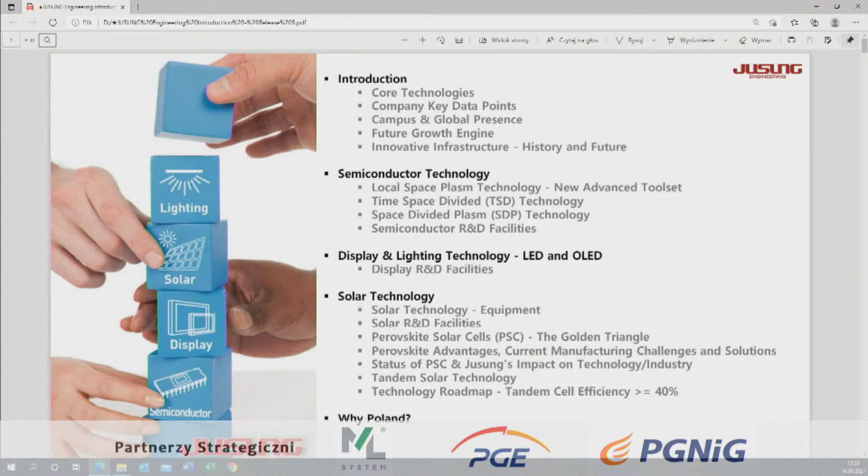I would like to do an introduction of the company, allow me to do that because it will give you a reference of who we are, where we came from, and how we got where we got today. I will also talk about some of the core technologies we cover, including semiconductor, display, LED and OLED technology. The last portion of this presentation will be about solar technology, which is probably more relevant to our partner. So go ahead to the next page.

Basically, Jusung is a South Korean company, and we cover three core technologies. One is semiconductor. The other is display, including LCD and OLED technology - we did a lot of TFT in the past. And we have a division of solar.

South Korea resembles, in certain ways outside the realm of geopolitics, very much Poland. So I do see that in Poland there are huge opportunities to go into these technologies. Everything was brought from either Japan or the United States, and it was basically copied. But then the government of Korea decided to create and invest in the semiconductor industry.

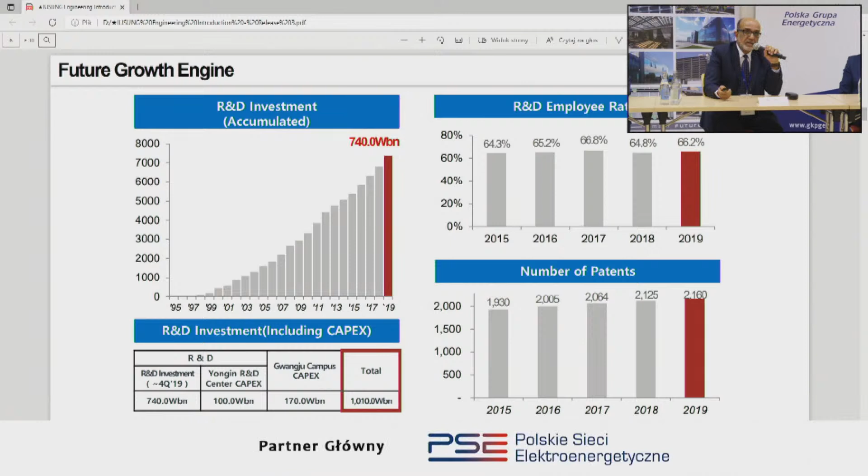This goes into a little detail about the structure of our company and our investment. This is very important because we take innovation at heart—if we don't innovate, if we don't do research and development, then we have no business. Over the years of the company's existence, we've spent about $1 billion on research and development. Employee-wise, we have 66.2% of people exclusively dedicated to R&D, and we have a bunch of intellectual property.

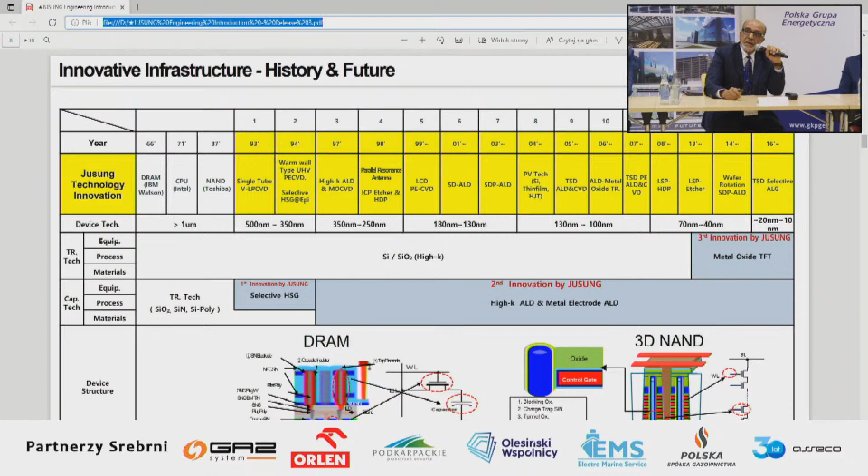This is just more detail, showing a little history of our innovation and where we're going. This isn't the latest or most updated data, as it stops around 2015 to 2019 maybe.

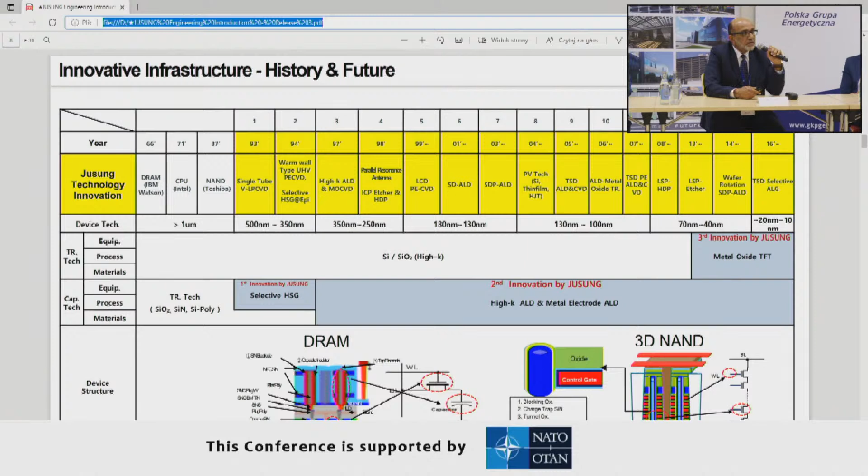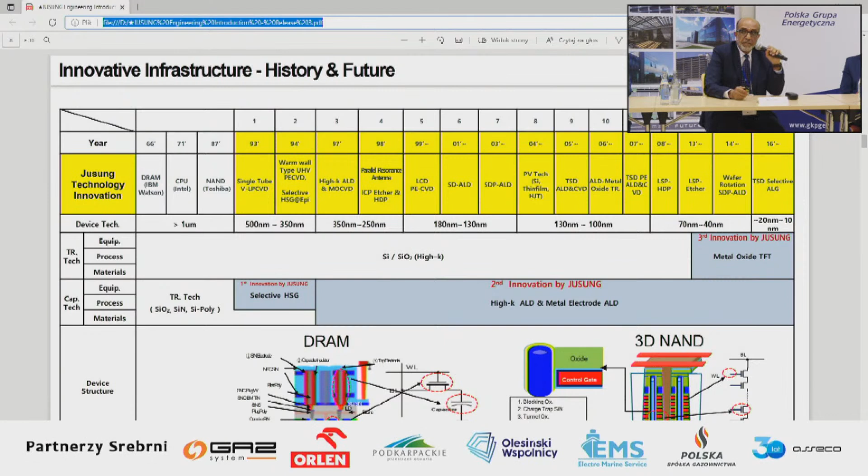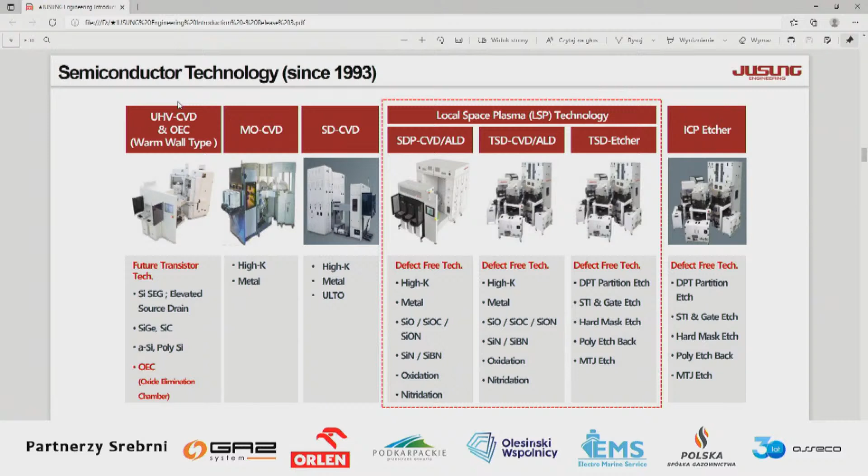With the semiconductor, I wanted to present some of the tools and processes. Since this conference has a lot of scientists and researchers, I'm sure they can relate to some of the processes we do. What you see on top are the deposition tools, CVDs, different types of CVDs, and in the middle you see the tool—at least you get an idea. But the bottom portion is probably most important, because that's what a professional understands when he looks at the process.

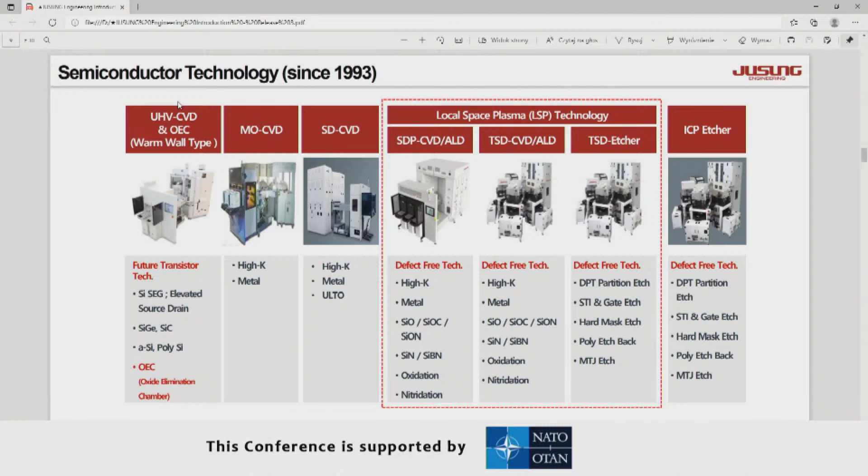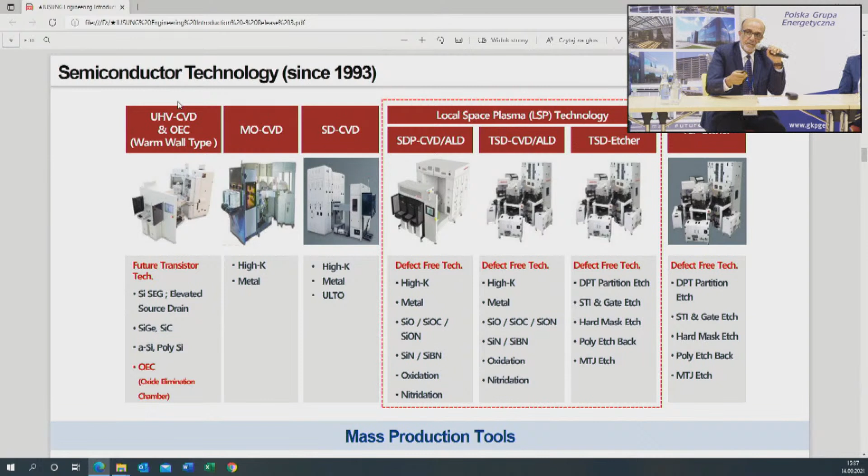We work with different materials and processes, like high K, deposition, STI, poly, and different things. The one circled in the middle, the local space plasma, is a very recent and advanced tool that does so many things for the industry—we sell them to a lot of our clients. I'll talk a bit about these things because for some professionals it makes sense when they see what I'm going to show them. Go to the next slide, please.

So basically everybody around the world has been building these deposition tools, different types, different processes, different sizes. But what we've realized in recent years is that you cannot do only one thing, you do multiple things that are correlated. If you start with one step, you've got to do the second and the third. Because of the real estate in these sophisticated fabs, our customers ask us how we can combine these processes in one smaller tool that gives us the throughput and yield we're looking for.

So we came up with this idea of LSP technology, local space plasma. Underneath that global category, we have two types depending on what you want to do with the tool - memory, logic, microprocessors. Then you get into time-space divided plasma or space divided plasma.

The most important thing, without going into details, is that these tools provide the best interface control, incubation time control, and low thermal budget, which is very important for a lot of processes nowadays. The system is very easy to set up and function, and very easy to integrate with other processes on the production line in your fab.

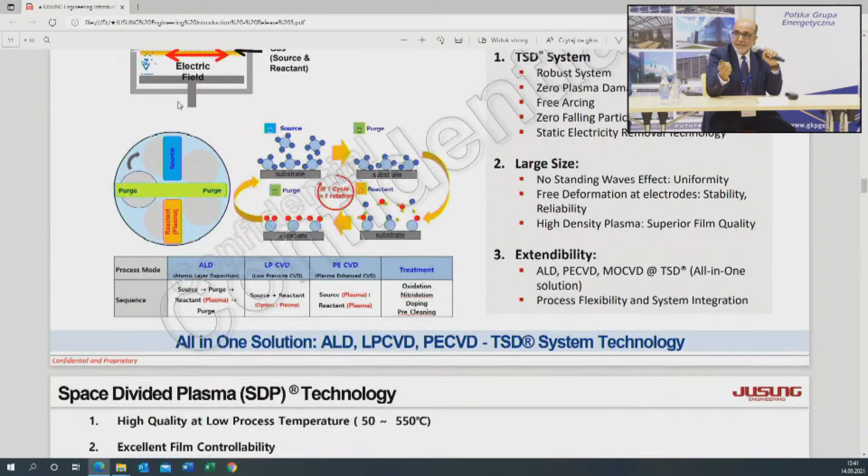Please go to the next slide. So some of the advantages of using these tools: number one is the thermal budget can be very low - we're talking about 50 Celsius, which is enough for a lot of applications to deposit different materials. Since we are a thin film deposition company, this is our very core expertise.

Step coverage, stress control, and even the etching is very good, and the rate is very good. Please bear in mind that these tools are for mass production, so they have to be very quick and have high productivity.

So for example, a CVD process is quite fast, but there are some processes where it takes more time because you need more complicated depositions. So we use ALD tools. An ALD tool is very slow, and everybody knows that.

But what we've done with this tool, since we have like a rack - this is a bit of an older version, the newer versions can tackle much higher production rates - it's like rotations: you put all your wafers on this disk, and they rotate at very high speed, and the deposition happens, whether CVD or ALD, very fast.

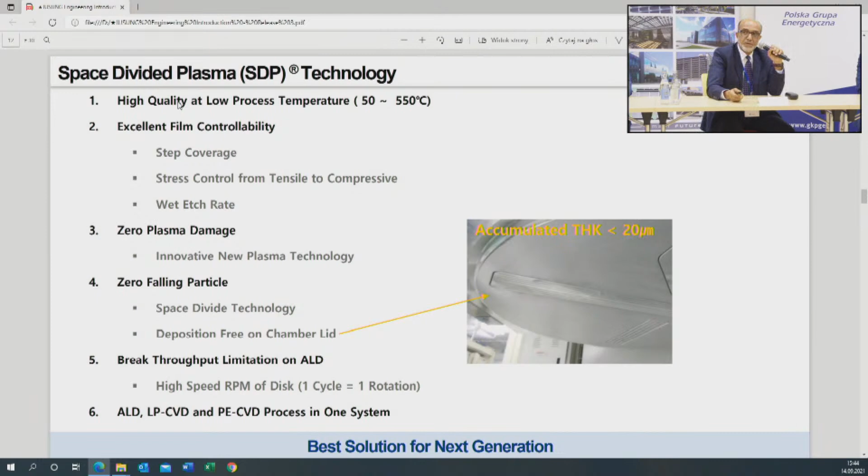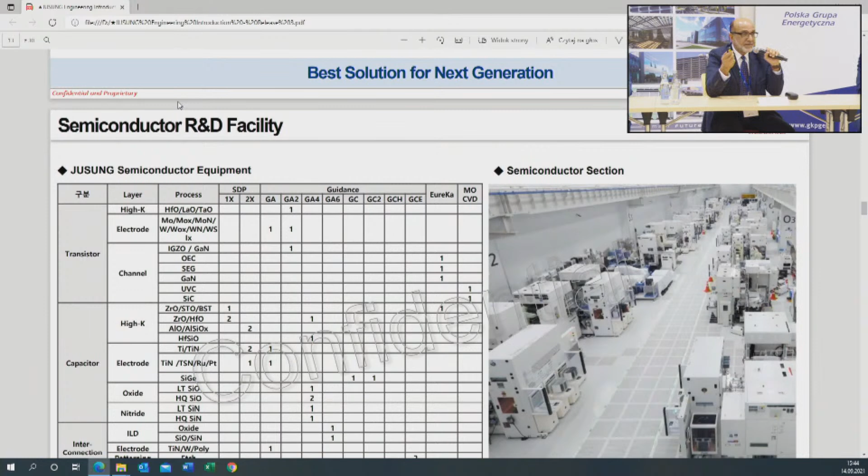So here I just showed very quickly some of the tools we have in the R&D lab. We spend a lot of money on R&D, and we spend a lot of money on our people, but we want to make sure that everything that gets out of Jusung is fully tested and working to the specs. Some of these tools also, we use for demos, because that's the first thing the customer asks. They send us wafers, and we go through a demo process, and once things look good, we start talking about the equipment. So this is just a snapshot of where we put the tools for semiconductor.

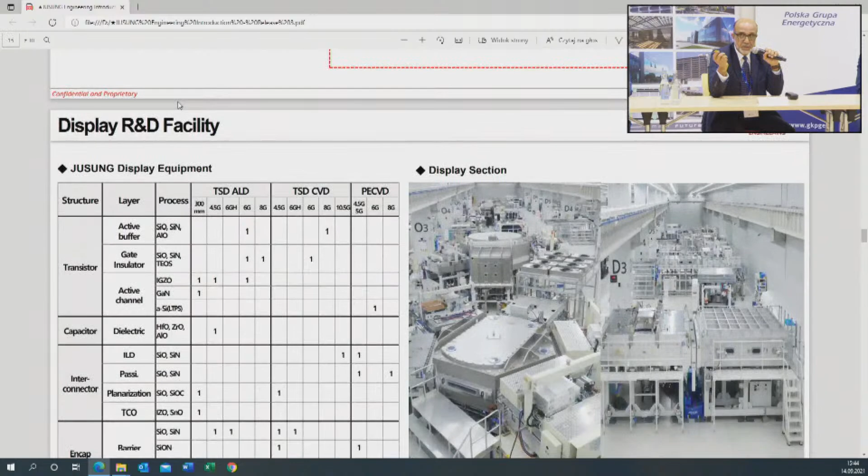Keep going. Again, the same thing, this is semiconductor display. This is a display. I need to go a little bit quicker because I don't have a lot of time.

If we look at solar, at one point we did thin film, we did flexible thin film, we did building integrated, we did vehicle integrated. One of the things we did is the heterojunction, because when we looked at it, it had a very good innovative future. So we jumped on this heterojunction technology, and we have actually delivered equipment and even did some technology transfer to Europe on the heterojunction technology at the mass production level.

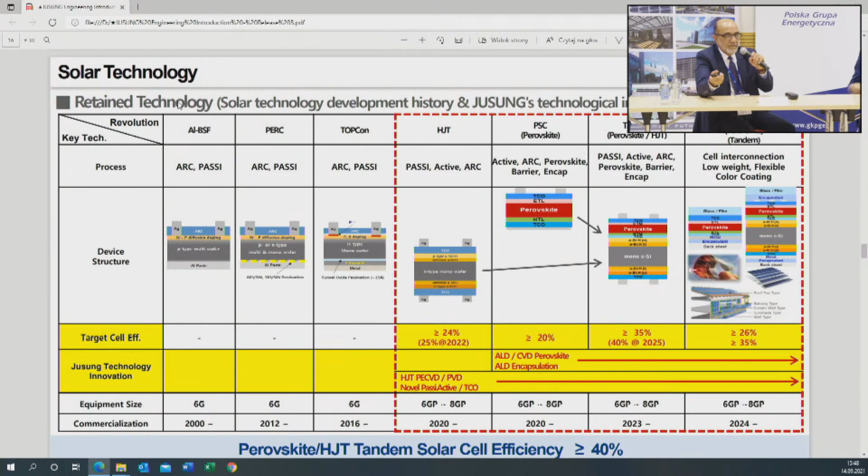But this technology of PV in the cell, that's really where we think it contributes to the idea of these glass panels, because that's where we do the conversion of the sun's radiation into electrical energy. So the cell is actually the heart of this, like smart buildings with panels and glass and so forth.

So we started looking at perovskites. Many people have been looking at perovskites. Perovskite, of course, is a material that we can find readily available. It's not rare. It's not very expensive, but it comes with a slew of problems.

At the beginning, when people started building cells using perovskites, they would build it, look at it, check it - whoa, I got 3% cell efficiency, great, super, that means we're succeeding. They turn around, go get a cup of coffee, come back, check it, and it's zero. It's gone, or it changes. Because the material being used has some properties that are very, very dynamic depending on the condition and the environment you are in.

So basically what we did, we said, this is a good innovative thing, let's look at it. And then we had some partners also who were really pushing us towards this.

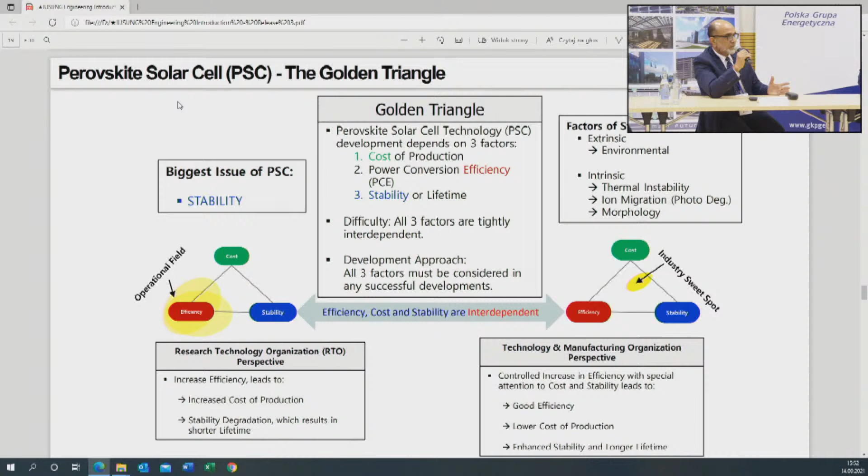But what we have realized is that the biggest problem in solving this dilemma is the stability of the material. Stability means how long this solar panel that we are building, or how long this solar cell, is going to last. If you sell a solar panel to your customer, you want to make sure that this solar panel will be at least operational at 90% or 95% for like 20 or 25 years. That's what the customer wants. You don't want him to change panels every year.

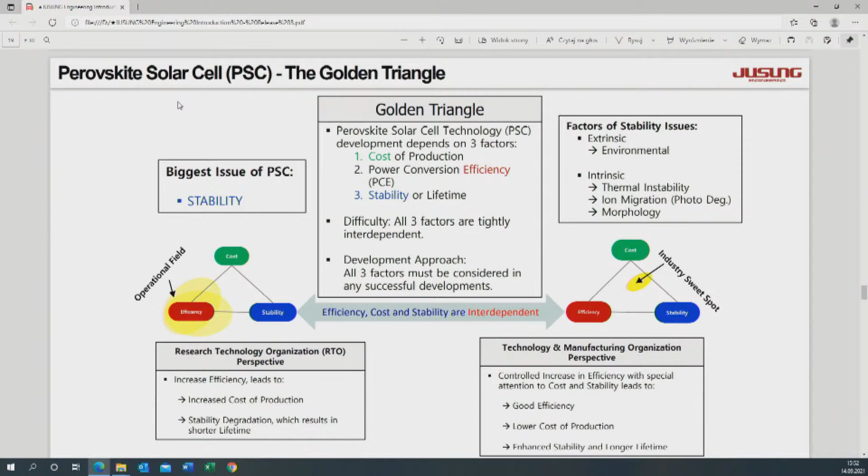So this is what we did then. We said we're going to look at these three things. So let's go to the next slide, please, which is good. So we looked at this.

For some of us, we already know this, so I apologize to the people who already know what the perovskite structure is and the crystal. Basically, it presents itself as an ABX3 structure - A being some material, B being some material, and X being some material.

I listed out some of the things that we work with. Some of the materials we use are organic, some are inorganic, and what the industry is realizing is that sometimes a good combination between organic and inorganic is probably the best. However, we need to do some extra work to protect the cell. So some of the advantages of the perovskite, as you can see...

Besides, it's a good technology that's going to propel us into higher and higher efficiencies. I think one of them is that we can exceed the theoretical limit, or maybe even a practical limit, of the crystalline solar cells. This limit has been set by two scientists - we call it the Shockley-Queisser limit.

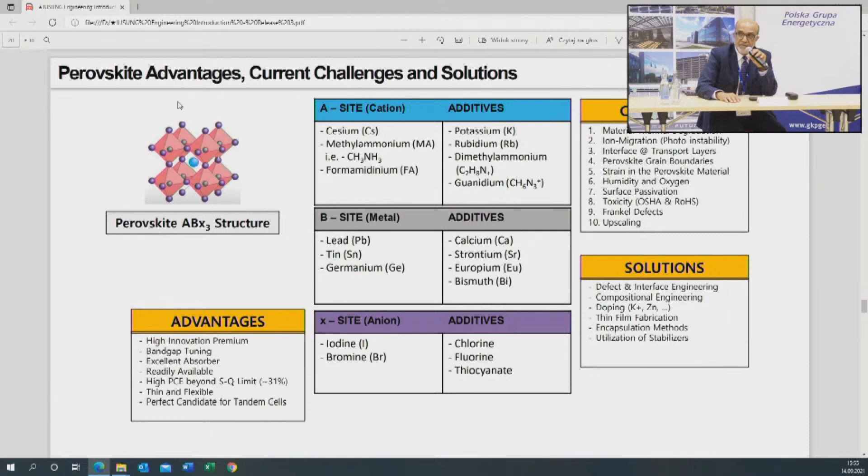I will not bore you with the challenges and the solutions that we have found, but let's go to the next slide if you don't mind. So what is the current state of perovskites right now?

So if you look at this, I'm going to go a little bit slowly on this one, because everything is very important on this slide. Basically at the bottom, if you look on the left-hand side, you see the top - that's the perovskite cell. In the middle, what you see like the gray granular stuff, that's the perovskite material.

On the bottom, you see the ETL, the electron transfer layer, and the top is the hole transfer layer. That's the encapsulation, and then we do the same encapsulation for the crystalline silicon-based cell. We have to make sure we have a TCO in place to conduct electricity laterally. In the picture on the left, the heterojunction cell is not shown, just so we can have a good blown-out view of the perovskite cell.

So basically, some of the problems we've seen, which gave us a lot of hard time, are at the interface. Every time you take a material and put another material on top or below it, there is some dynamics that takes place. It can be physical dynamics, or chemistry, especially chemical dynamics between the molecules. So what we try to do is eliminate those dependencies on the layers.

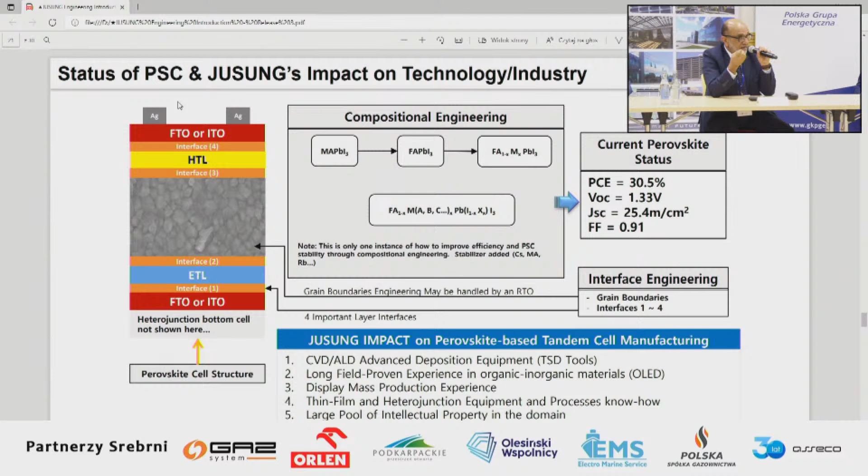I put in the bottom why we think we can close this gap, because this ETL, what you see in blue and yellow on the cell, the ETL and the HTL, is the same thing we deposit for OLED displays. If you have an OLED TV in your house, it's very sensitive to humidity and oxygen. So if you do not encapsulate and protect the screen inside very well, it will degrade very quickly - it won't last more than a few days.

So we do the same, using the same principle. We have equipment that has actually been adapted from the display industry and is being used right now for the perovskite cell.

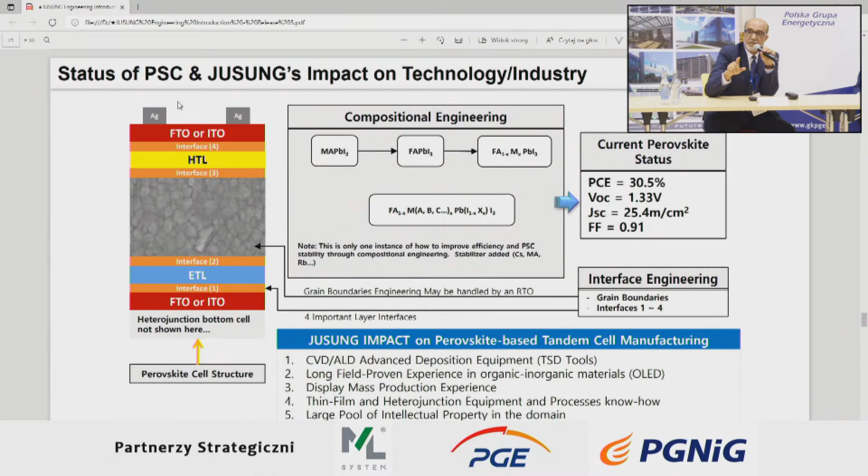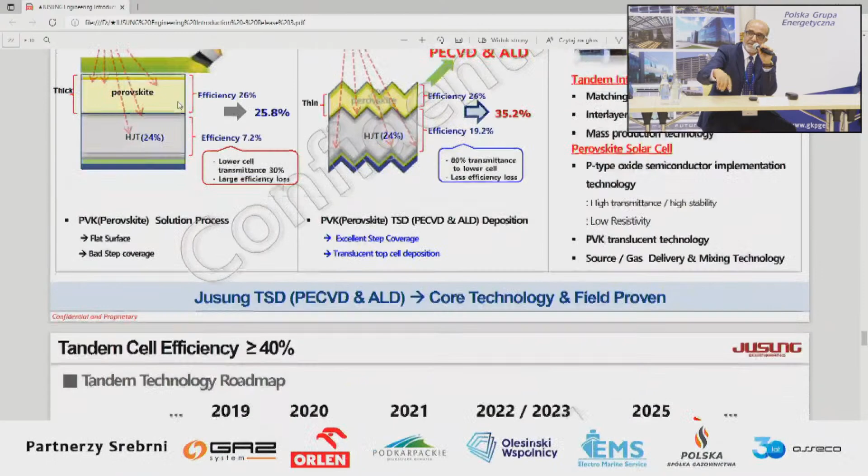Okay, let's go. This is technology, so I'm going to skip this. This is important though - this is our roadmap, very quickly. This is how we think: a goal without a plan is just a wish. If you look at this, behind it there is a huge plan of how to get from 2019 to 2025 and what we are doing.

On the top you see heterojunction technology, and on the bottom you see tandem technology. What we've done so far with heterojunction technology is as good as anyone else on the market, but we're reaching the threshold of heterojunction technology. So we need to add perovskite as a tandem cell. When 2022-2023 kicks in, we're looking at 35% cell efficiency, and beyond that, we're looking at even 40%. That's our plan, that's our goal for the future.

In terms of equipment, on the left-hand side we have a turnkey line solution for heterojunction. In the middle you have the perovskite cell making, and for the final part, we don't do print and screen. Go to the next slides.

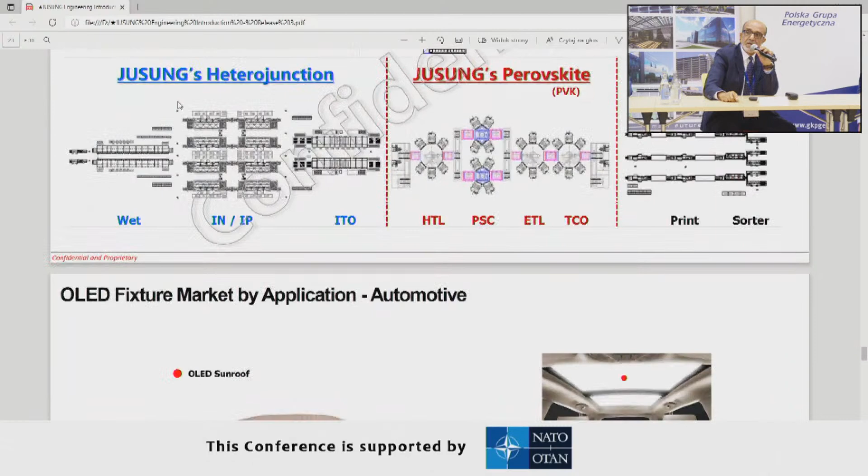Okay, this is only things we've been working on in automotive, because we've also combined OLED with PV, and we can do these things. We're working with some companies that you know in Korea and Germany.

All right, same thing with OLED lighting.

Keep going. I want to do the last slide. This is probably, you know, I'm going to try to make it as short as possible.

So a lot of people ask me, why do you come to this country? Why would the Korean want to come here and invest here and work here and develop partnerships and relationships? Well, those are some of the reasons we can think of. From a partner perspective, we are convinced that we're picking a strong industrial partner who has experience in an industry, whether he's doing glass, whether he's doing PV. At least he has the logistics, he knows what he's doing, he knows the business, he knows the market, how to sell, how to manufacture, and all this is very important to us.

So the first slide, the first window, you see that we have an industrial partner, and we're thankful that we have met ML System, and I think it would be an ideal partner. They have experience in BIPV, which is a plus, so we don't go through the basics again. They have a captive market.

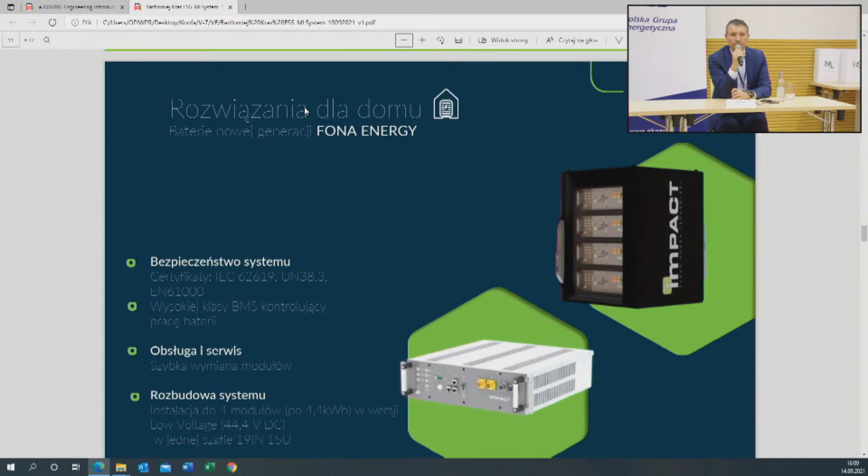First sector is home storage, and here we have developed the product called Fona Energy. It's a 4.4 kilowatt-hour, 44.4 volt battery pack for home PV installation. We have just launched the production line in our facility in Pruszków for 30,000 such battery packs a year, so we are prepared for the Mój Prąd 4.0 program.

The second product is destined for business, for modern supply of industrial facilities, so combining PV and batteries together. Later I will explain the business case about it.

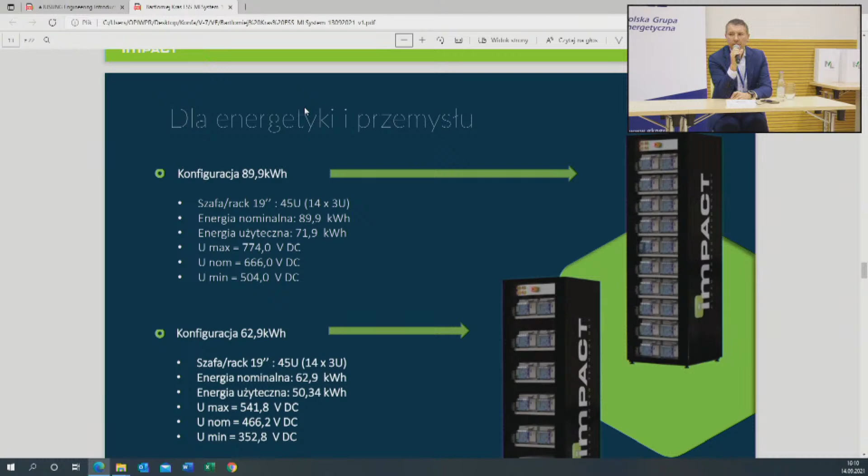And the last product is dedicated for large energy storage and large PV farms. We have developed a lot of such installations in Poland today, but practically none of them is equipped yet with energy storage, and future solutions for our power system will require also placing larger battery pack systems.

We have several installations done in Poland already. The very first one was made for Innogy in 2016 as a pilot installation of rather small power, 30 kilowatt hours. But then we commissioned two more large installations.

The next one started to operate this May. It has been developed for PKP Energetyka, and this large battery pack system is directly connected to the catenary grid to supply power for the Pendolino trains, and to keep the power inside the power lines. It has 5.5 megawatt power and around 2 megawatt hours of capacity inside the batteries.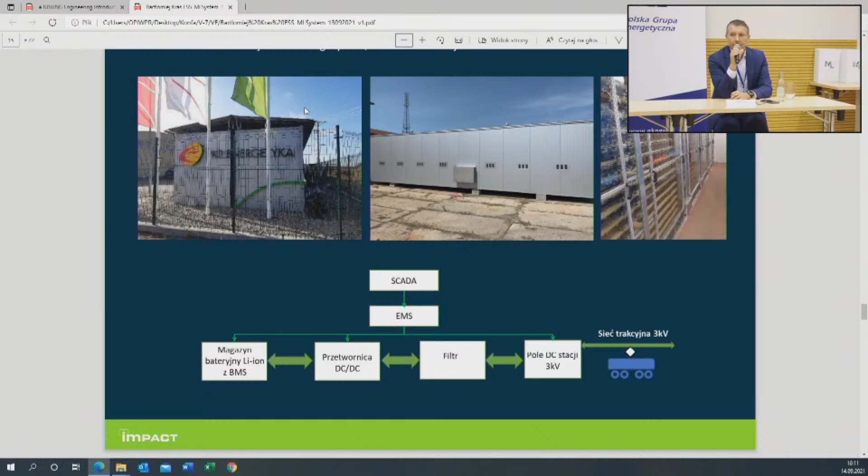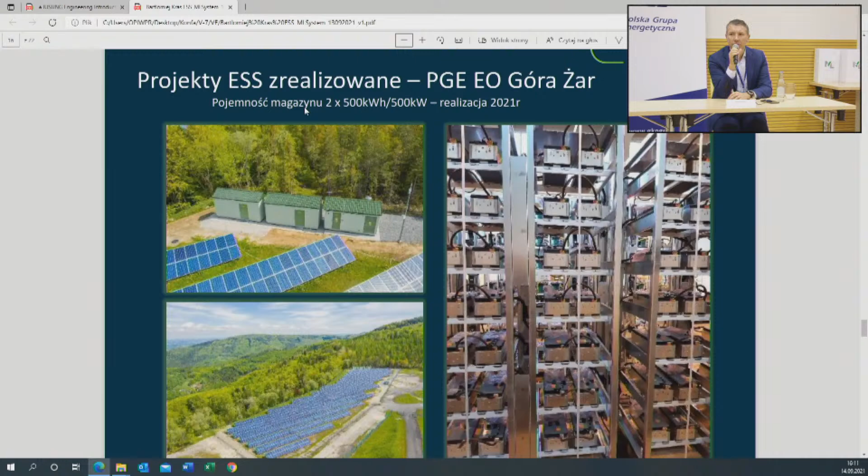And the latest installation, commissioned in June this year, is one of the first installations in Poland - a battery pack directly connected to the PV farm located south of Poland on Góra Żar. There is a PV farm belonging to PGE, and we have installed there an energy storage of 1 megawatt hour, which started to operate this June, and PGE is planning to make tests and validate it.

Now I would like to speak a little about how to size energy storage to the PV installation. This is a very common problem, because we have many factors in choosing the right PV installation and choosing the right energy storage. So this is a case from one of our customers who came to us asking whether we can size for him the PV installation and battery energy storage.

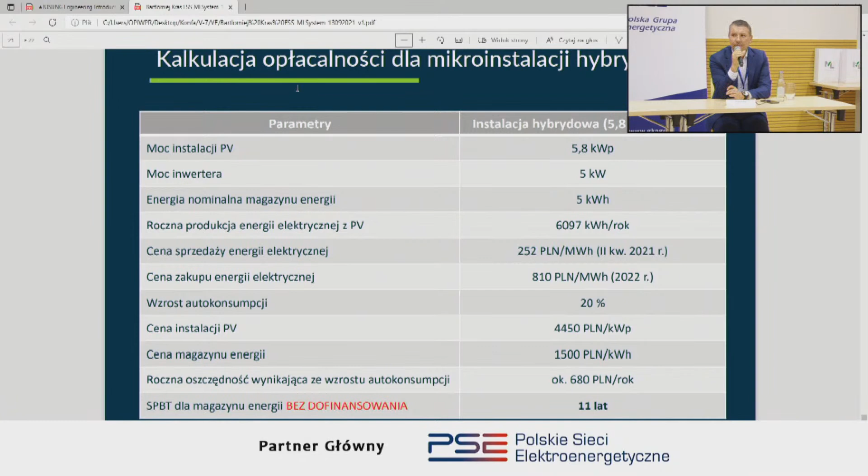So this is all what I wanted to explain, and we invite you to contact our company for all those sophisticated calculations. Of course, we are exactly in the middle of the decision-making process by our government on whether to subsidize battery storage in the next year, making these calculations much more profitable, or postpone this for later. So I would like to just present the situation without any subsidy. This is the situation on the Polish market today.

Thank you very much.

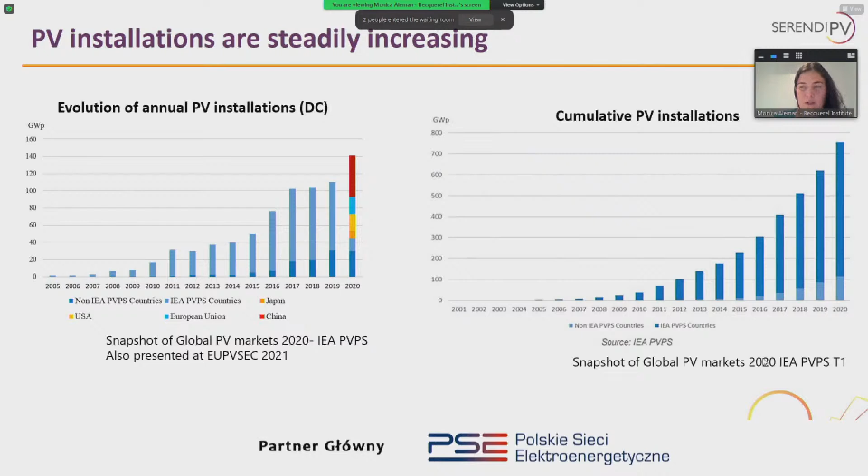So before I introduce SerendiPV, I think the most important question is why we're doing this project. The main thing is that we see the cumulative PV installations are rising. This hasn't stopped, and yearly installations for the world are at the moment over 140 gigawatts. So we know that this is going to become a much bigger thing in the future in the energy grids.

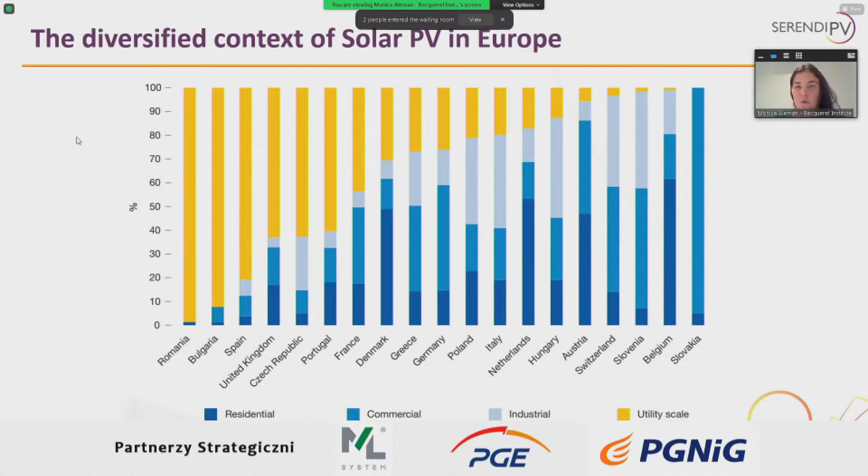If we look at the context of solar PV in Europe, we see that depending on the country, there's a big difference in the application of residential PV or utility scale, with countries like Romania where most PV applications are utility scale based, or Belgium, where it's more residential PV.

The question is how can we reduce the WACC, basically increase the trust in PV production and in PV systems for financing companies. What we plan to do in SerendiPV is work on quality control, component reliability, system reliability, and energy yield assessments. The target is to increase the lifetime of PV systems and components, and especially increase the performance of the PV systems.

Another issue relevant for the project is that PV systems are becoming more and more diversified, so in terms of modeling and yield modeling for such systems, there are differences that need to be taken into account. We have floating plants in France, more and more solar PV installations that can look like this or can be on greenhouses, BIPV, and plants in the desert.

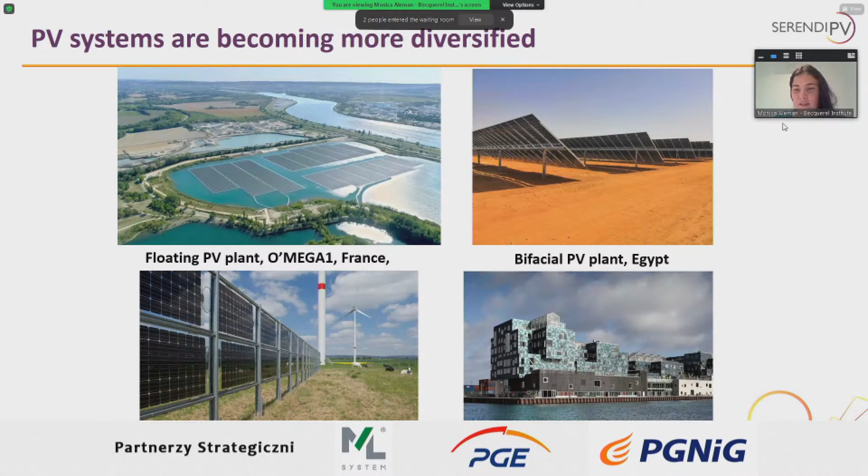If we look at the total penetration of PV for different countries, we see that at the moment in the EU we're at about 5% on average. This is for 2019. But the idea is that with the increasing penetration of PV, this is going to create a bigger challenge for the network.

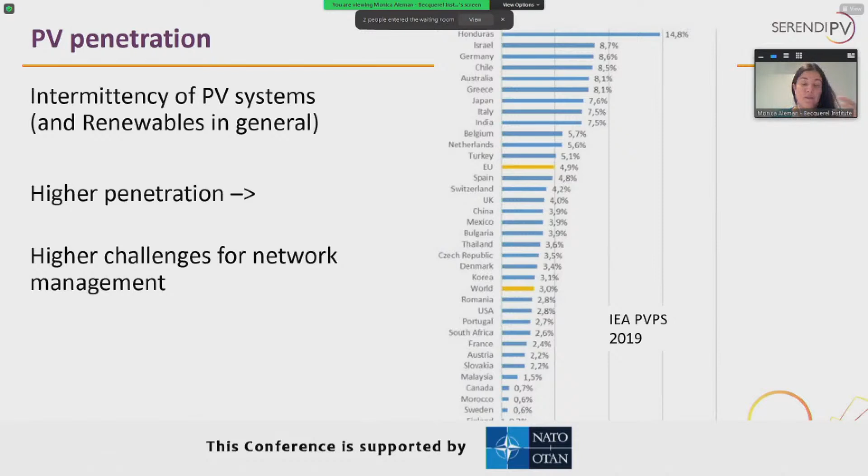The targets in order to maintain the Paris Agreement have been calculated by LUT University in Finland. They expect that solar PV should represent about 69% of total electricity production. So this is going to be huge if we want to maintain the Paris Agreement.

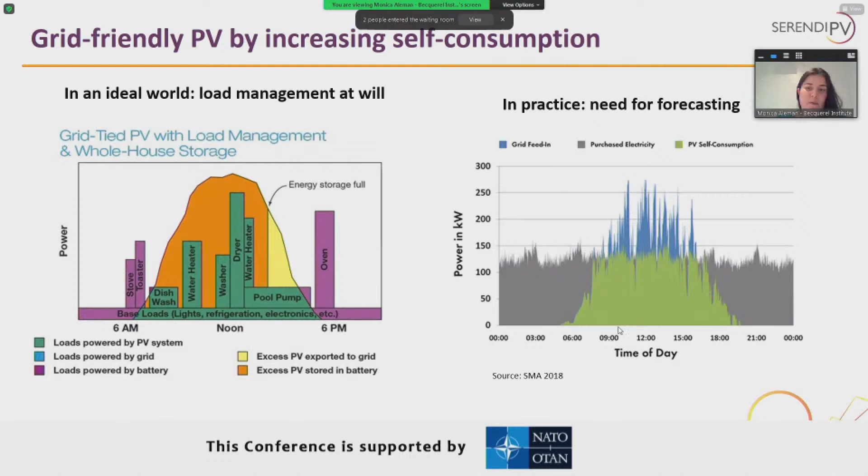Ideally, when we do the integration of PV in the grid, we would like to be able to define exactly what's going to happen in terms of load management, so we can adapt it to PV production and also use storage systems. In practice, we need to do a lot of forecasting, because precise predictions of PV production are very important when this would represent the biggest part of electricity production in Europe.

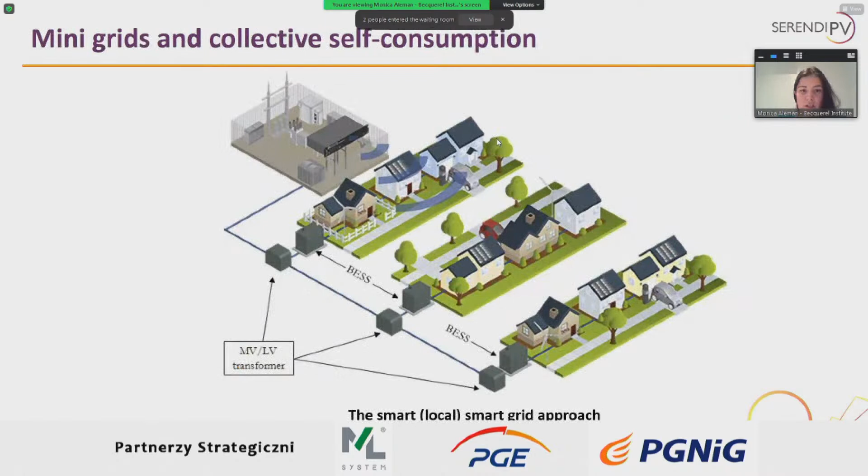One idea people are working on is considering mini grids and collective self-consumption, where you would have a set of houses connected to a battery system, and these could be connected to one another so the consumption and production could be optimized, not just at a house or residential or company level, but also for a small local energy market.

If I bring all these points to SerendiPV, what we want to do is increase the reliability and performance of PV systems, decrease the LCOE, increase the profitability of PV generation in the grids, and increase the stability when PV penetration is higher. At the end, we want to lower the barriers to enhance the development of the PV sector in the EU. This is what SerendiPV is looking to do.

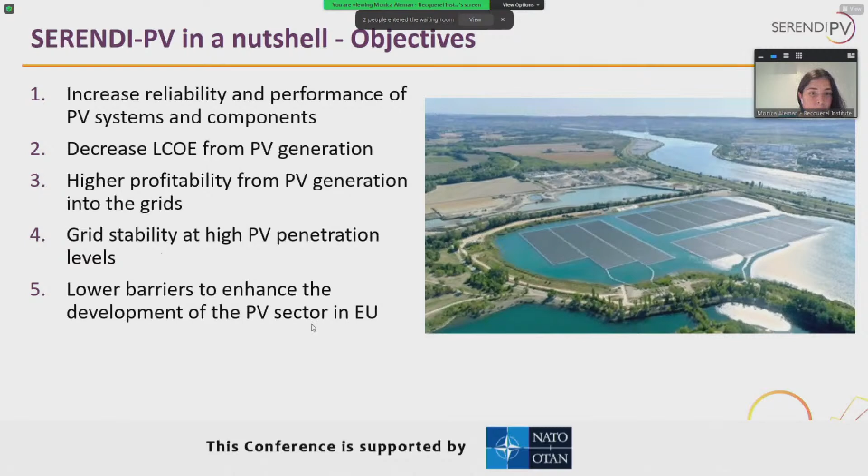So we have developed 7 axes to be able to do that. I'm going to go one by one later, so I'm not going to spend much time on this slide, but here I'll explain a little bit about each one.

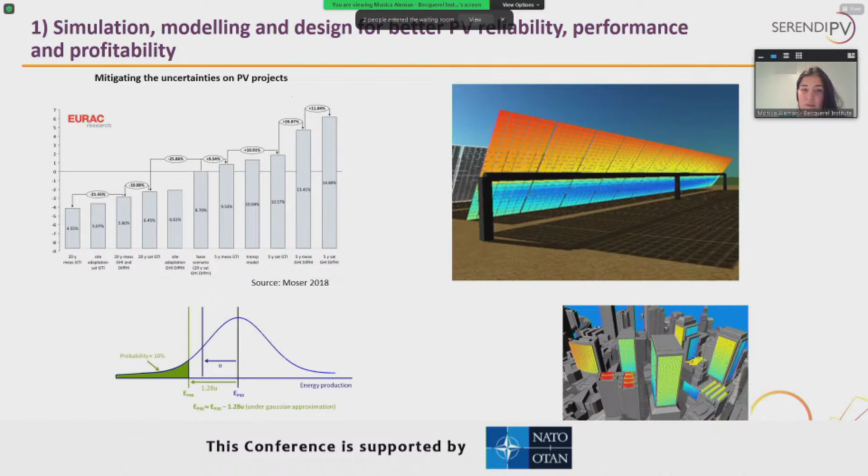The first one is about simulation. Here we want to improve all the modeling parameters and modeling tools in order to give better reliability about the performance of PV systems and increase the profitability. Afterwards I can send you the slides so you can look at the references.

The second working axis is about monitoring and image-based fault diagnostics. Here we want to improve the monitoring of PV on the field. For this, we're developing soiling kits that can be installed at PV plants, and we're improving the modeling of PV plants which might be covered by soiling issues. The whole point is to improve the reliability of the energy yield assessment and to reduce the factors that are reducing the production of PV plants.

Then we are putting in place quality control equipment and procedures for PV components. Here you can see some examples of what we can do in some universities like at CEA. They have testing sets where they can very well define the failure mechanisms of PV plants, and then the idea is afterwards to introduce quality control procedures.

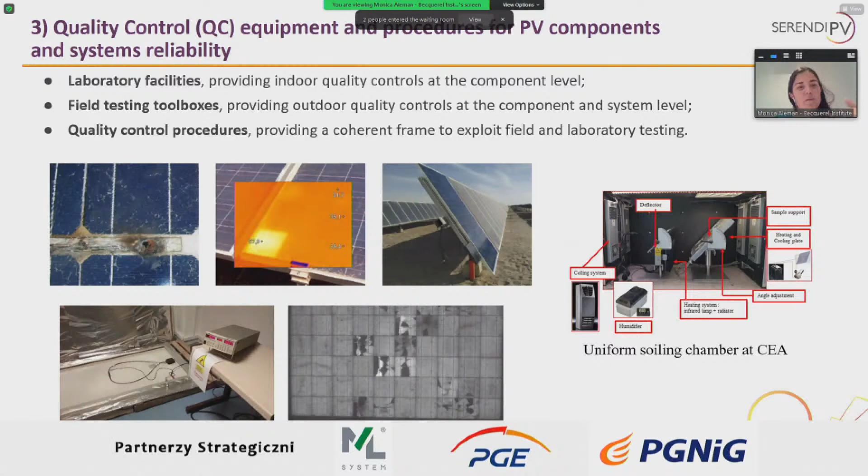Then we have an axis called forecasting, where Solaris and Fraunhofer are very active. The idea is that you start from numerical weather predictions, then look at satellites for cloud motions, so that you can use machine learning with real-time PV power measurements to improve the forecasting mechanisms.

Then we have one axis about looking at new business models. As I mentioned before, you have new companies popping up, like Mylight Systems. What they propose is a service to customers who can optimize their self-consumption by giving access to their PV production and their electricity consumption or electrical load at their houses to this company, so that they switch equipment on and off depending on when PV production is highest, to reduce the exchange with the grid.

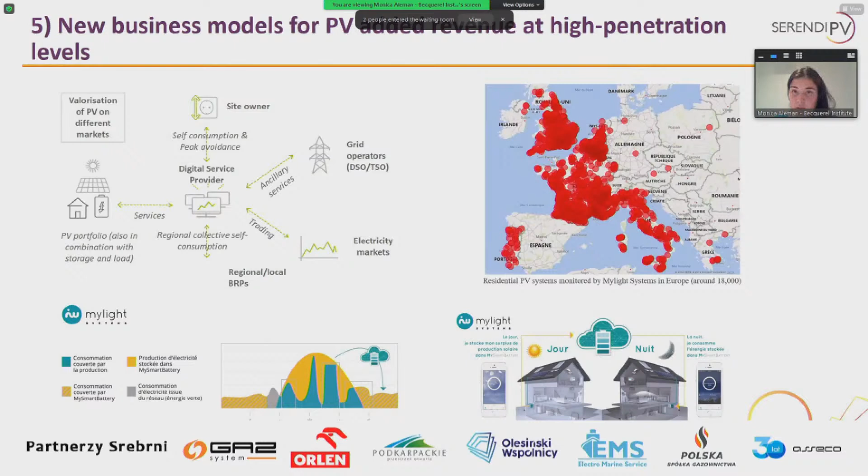On the other hand, you have companies like Next Kraftwerke. They are a virtual power plant, working with a lot of different PV plant owners, and they handle a share of their PV production to put it on the market and to be able to provide ancillary services for the grid. So basically this represents a different way of making money for the system, because they're providing flexibility to the grid, and this is very important.

Then we have one axis about the technical constraints for integrating large volumes of PV into the grids. This is something we have also been learning from the project: today most energy is produced in a centralized way, but in the future this is going to shift from the centralized transmission lines to the distribution lines, where you have all the small systems producing electricity everywhere.

This is something that needs to be handled in terms of data. So we have a whole working package about understanding how to improve the architectures for data transmission. Depending on the country, regulations in the EU are very different at the moment. In Germany, they already have quite mature processes for this data, but in other countries it still needs to be developed, so we're looking into this.

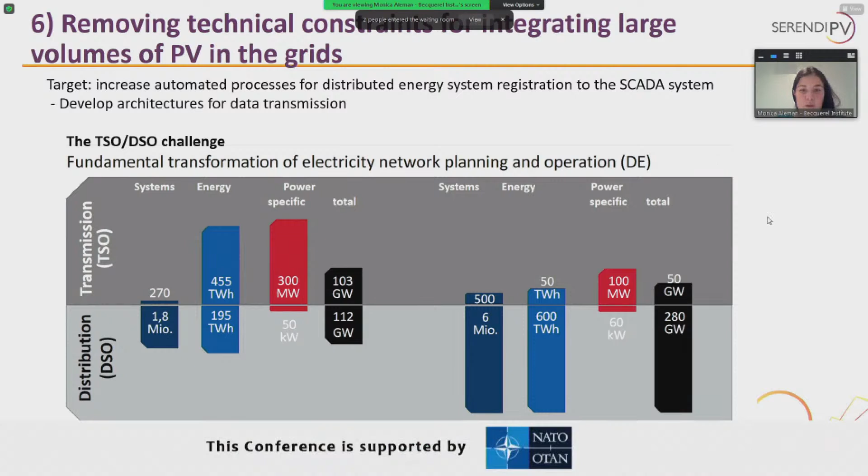Basically, the idea here is that you would have different economic applications in terms of power purchase agreements, system services and billing, and so on. In terms of technical operations, you have monitoring, self-consumption, and software updates, and then you move into network control, where by gathering all this data together with companies like Next, for example, you can propose curtailment or adapt parameters, and then state estimation. In the future, the idea is that you'll be able to do some plug and play, and maybe work with cellular networks and resilient networks for managing all these distributed PV systems.

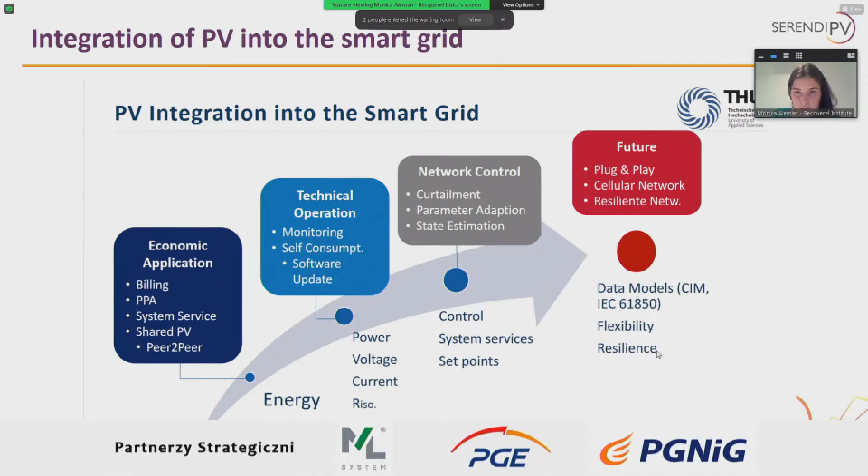So I think with that, I am done. I'm sorry if it was too quick, I need to leave very soon. So yeah, this is basically what we're doing in SerendiPV. You can go to the project's website and look at the results we've been gathering. As I mentioned, it only started in 2020, so there's still a lot of work to be done.

Thank you so much, Mónica, and sorry again to keep you waiting. It was a riveting presentation.

I'll make time for one question, it's going to be from me. What do you need to do to hook up your PV installation to the SerendiPV project to contribute? Is it possible, because we have a fully operational PV installation on our buildings that we have monitoring of, to contribute with that?

Can we do that? Yes, of course. So we have one working package about a collaborative platform, where the idea is that we can work with different people who have installations, and then they can share their data. For the time of the project, we can offer some forecasting services if this is interesting for you, and in exchange you'll have a bunch of research institutes and companies analyzing your data to use it for the project. So yes, indeed, if you have production data this is definitely interesting, especially for BIPV plants and innovative plants.

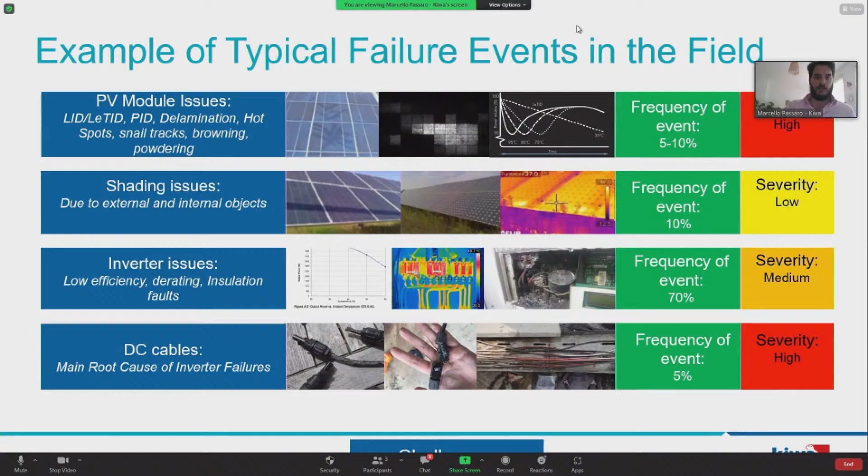So if we look at modules, we have to understand that a module is made of multiple layers. I don't have to explain that here, I'll be singing to the choir. But the frame is there for mechanical strength, glass for weathering protection. You have the encapsulant, which can be EVA or POE. That provides electrical isolation, but can also lead, if it's a poor EVA or poor POE, to acetic acid formation, yellowing, which would also degrade the module's performance.

And then the backsheets, multiple different kinds of backsheets from suppliers. They're optimized for a longer life, but some are better than others, or some are made differently than others. And all these little variations in production can also impact the performance and reliability of the module.

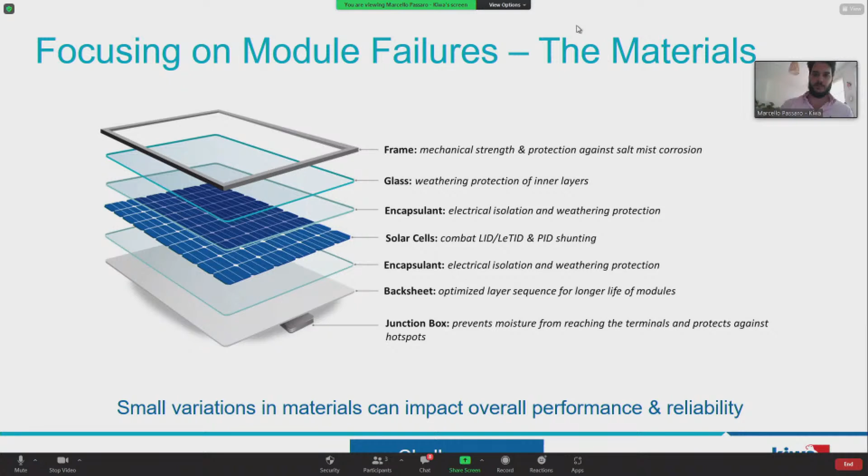The next level is that we have to understand a module goes through a production line. So the cells come in, encapsulant, glass, they all come together to make one. Each station can have small variations, which can have a big impact on the end product.

One of the most critical parts of a production line is the lamination process. The lamination process is usually a good indicator of how the module will perform in the first 5 to 10 years, and the materials from the 10th year onward. A lot of the root causes we see are due to poor lamination, usually delamination and so forth.

And what we also need to see now from the research, the work that we are doing in pre-line inspection, factory audits, is that there is an uptake of new technologies. So shingled, half-cut cells, that means there's a very high learning curve on how to work with them. High learning curve means more risk of variations in module quality. That's why it's important to look at how familiar that workshop is with a new technology.

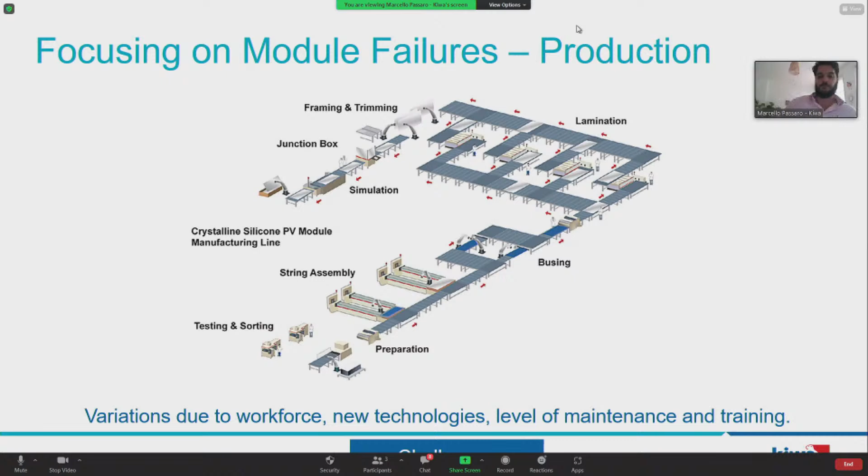So to put it into a bigger context, a Jinko, a Longi, a JA, a Trina, they have multiple location sites. Let's say one in Shanghai, one in Suzhou, Xi'an, Shangrao, and in that location site, they have multiple workshops. In those workshops, they have different production lines, different equipment, different quality procedures. So one workshop can produce fantastic, great quality modules, and another can produce less so, impacting the overall quality of that location.

That is something that's often not taken into account, and there's also the seasonality of module procurement. When I was there, we often talked about how around Chinese New Year, you don't want to buy modules because there's a big leaving of workforce during that period.

Then there's certification. The certification is absolutely critical to give an overall indicator of quality, but it is not a guarantee of quality. Why? Because the production module sometimes may vary from the certification module. The certification module is based on a certain bill of materials. But as I mentioned before, the production module can change because of supplier issues, then they have to change the material. But normally, a certificate is given for a set bill of materials.

So we have the IEC 61215, which is for quality. You have the IEC 61730, which is for safety. The 61853, which is an energy matrix, used for that PAN file in PVsyst to determine what the energy yield of the project will be.

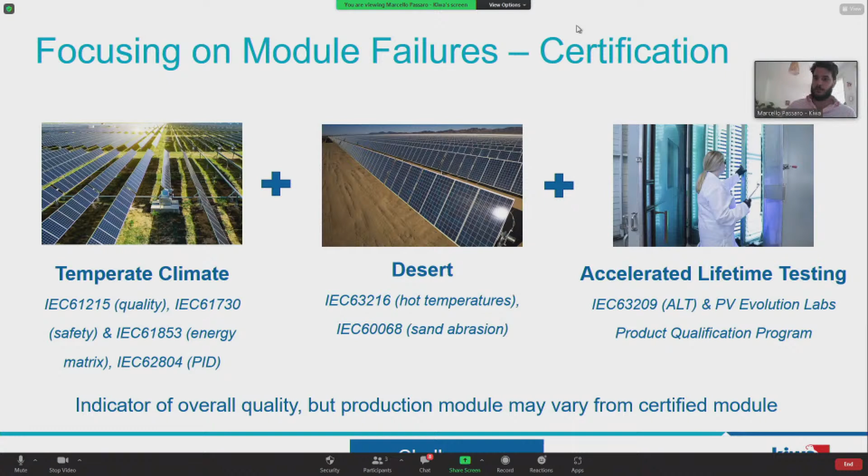So why is the certificate sometimes not sufficient? Well, Fraunhofer ISE had a very good point. They made the bathtub risk model. So in the first few years, you'll see more failures, and then it evens out, and then it goes up. But IEC 61215 should give you a good indicator of the first 20 years.

However, because of the different applications, accelerated lifetime testing is needed. And you see this from the field, that despite the certificates, there are more failures than expected because of different applications.

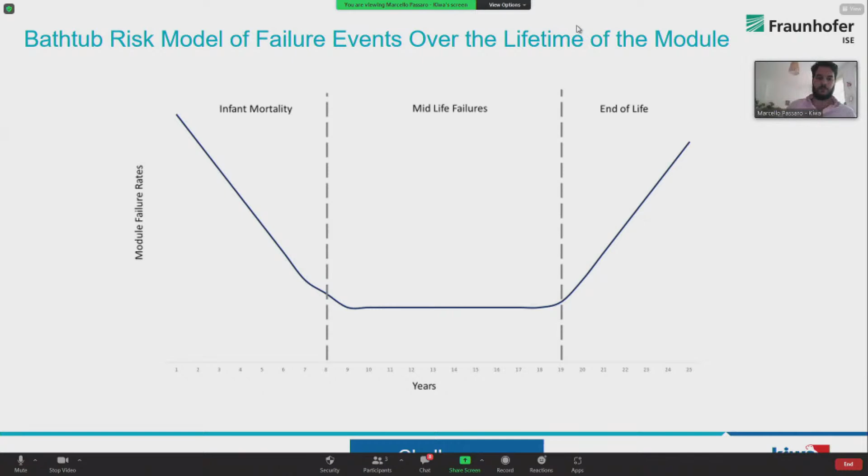So what are exactly these failure modes and degradations that we're talking about? Well, this is very well studied. In the first few years, you'll have light-induced degradation. This can then often show up as junction box failures, glass breakages, or loose frames. Then light and elevated temperature induced degradation can take years to degrade, but it will also recover over years.

Midlife, you see PID issues. At end of life, you really start seeing delamination and EVA discoloration.

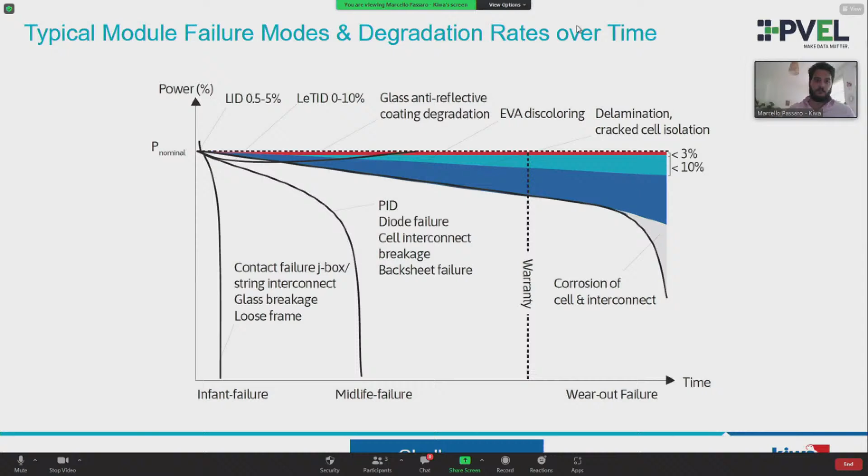And what we've seen to date, because we do a lot of batch testing of modules with regard to power, is that 40% of the modules that we test are below the minimum power level. I'm very interested what Antti Tolvanen will have to say, considering they have solar simulators and testing. So I'm very excited to see his results.

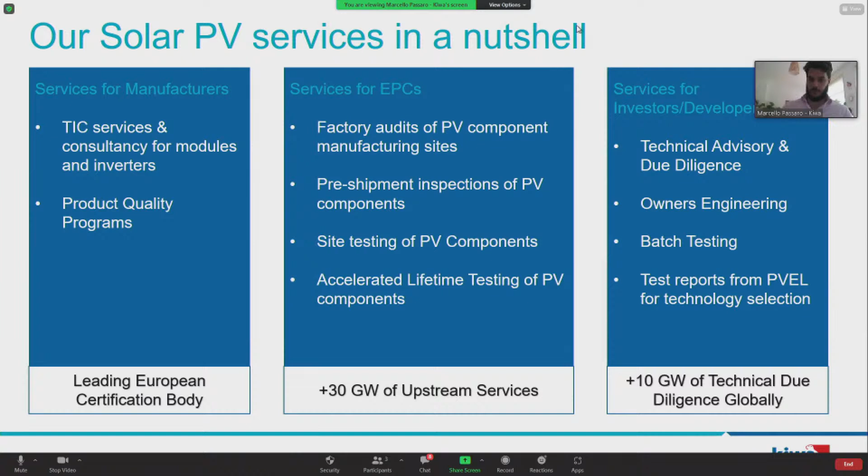And for investors and developers, to avoid, as I mentioned before, irradiance bias issues and designing issues, we have the due diligence from Kiwa Moroni, where we can do owners engineering, technical advisory, and even do test reports on the batch testing.

So just to give a bird's eye view of what we do: in the USA, we have PVEL, a member of the Kiwa group, for the qualification testing of modules, batteries, and inverters. In the Netherlands, we have pitched roof testing. In Germany, battery and inverter certification. In Turkey, we could do the CTI values, for example backsheet testing.

In China, we can do lab testing, and in Italy, where we're mainly positioned, we can do a lot of the batch testing, certification of modules, also for larger inverters, because now we're going up to inverters of 315 kVA, if I recall correctly. And you have, of course, the independent engineering, which we've already done internationally, in so many different countries.

So that's a bit of a presentation. I wanted to keep it short, given there was a little bit of an overrun on the other one. So I hope I didn't go too quickly.

But if there's any questions, feel free to send an email.

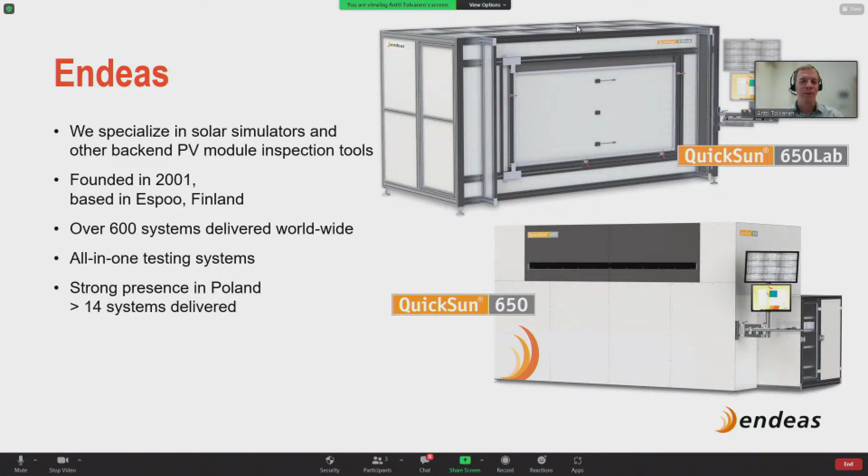My agenda is to talk about the trends in manufacturing metrology, mostly focusing on testing of PV modules in the back end, and we'll also look at some updates to standards in the IEC 60904 series.

To support PV module manufacturers in their aim for better quality, IEC has released new standards on the subject. IEC 62941, Quality System for PV Module Manufacturing, supplements ISO 9001, and among other things gives best practices for module design, manufacturing processes, and control of bill of materials.

Another new document from last year is the IEC Technical Report 60904-14, Guidelines for Production Line IV Measurements.

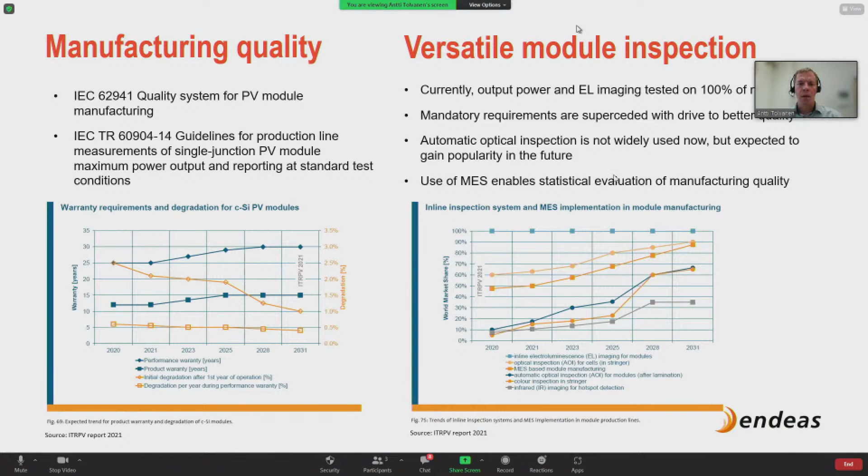My emphasis today is on the back-end testing of PV modules. Marcello already showed you that lamination is a major source of faults, so finding faulty modules already at the factory is very important.

After lamination, we have module trimming, framing, junction box curing, and this is then followed by module testing, which consists of module output power measurement in the solar simulator, then electroluminescence inspection.

EL shows micro cracks, soldering issues, and so on, that may not necessarily cause noticeable power loss in the solar simulator, but only in field conditions. Usually EL imaging is also performed before lamination. But the final back-end image is very useful because it records the state of the final product.

Optical inspection can see some of the same faults as EL, such as displaced ribbons and cracked cells, but as EL imaging can only inspect cells as they emit light, optical inspection can detect other parts of the module, such as the frame, barcode label, and contaminations.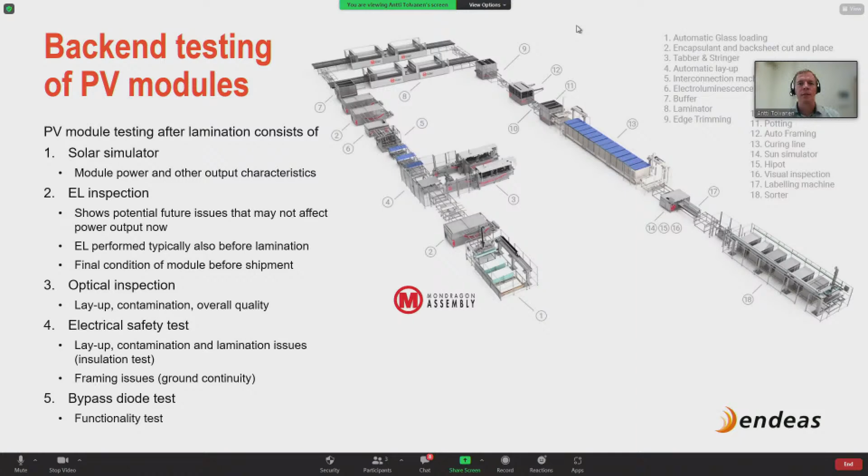First, solar simulator or flasher. Recent increases in cell sizes to M10, M12 are leading to larger increases in typical module sizes. The handling of large, heavier modules increases the need for automation, and this applies across the production line.

Checking the irradiance non-uniformity of the solar simulator is emphasized in several standards, as effects of non-uniformity cannot be corrected in an IV curve. So large modules need large testing areas in simulators, and their uniformity measurement requires a lot of test points. Good tools for uniformity measurement are essential. For example, we have integrated fully automatic uniformity measurement instrumentation in our all-in-one testing systems.

Now, another point is the capacitance of modules. It's related to the open circuit voltage of the cells. Higher capacitance generally requires a slower measurement. There are several ways to measure highly capacitive modules accurately.

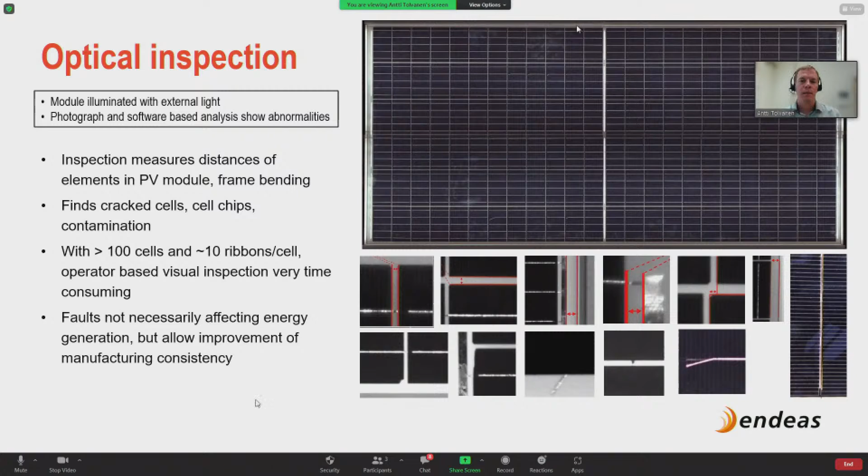Electrical safety tests are not mandatory according to IEC 61730, but for US market, the tests are required. On the other hand, adhering to the quality system for PV manufacturing requires that all modules be tested to validate their safety. Bypass diodes can be checked also prior to assembly to the module, but insufficiently organized ESD protection on the production line can lead to their breakage. So final testing of the diodes can also be warranted.

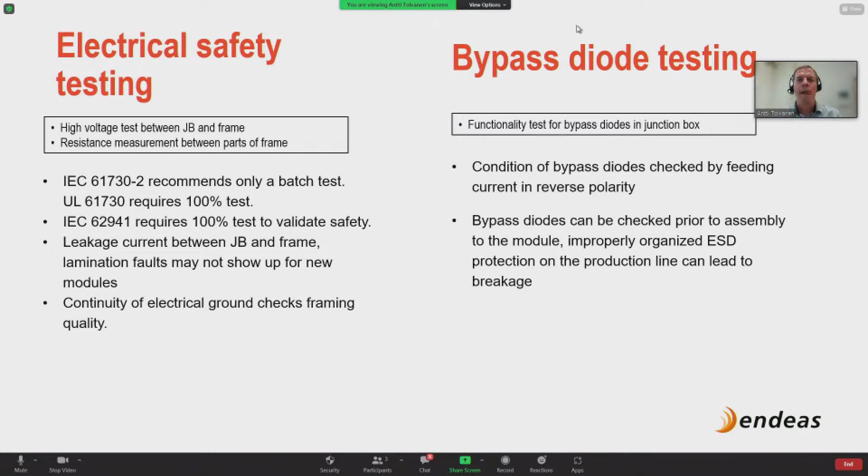Let's then look at the two main standards covering IV measurements of modules that have been updated last year. The first standard covers the classification scheme for solar simulators. The classification is based on 3 main characteristics of the solar simulator: spectrum, irradiance non-uniformity, and irradiance stability. The third edition's biggest changes have been made to spectrum classification. The wavelength range of interest has been extended, now 300 to 1200 nanometers, to better match the responsivity of today's modules. But existing solar simulators can still be classified with the old wavelength range of 400 to 1100.

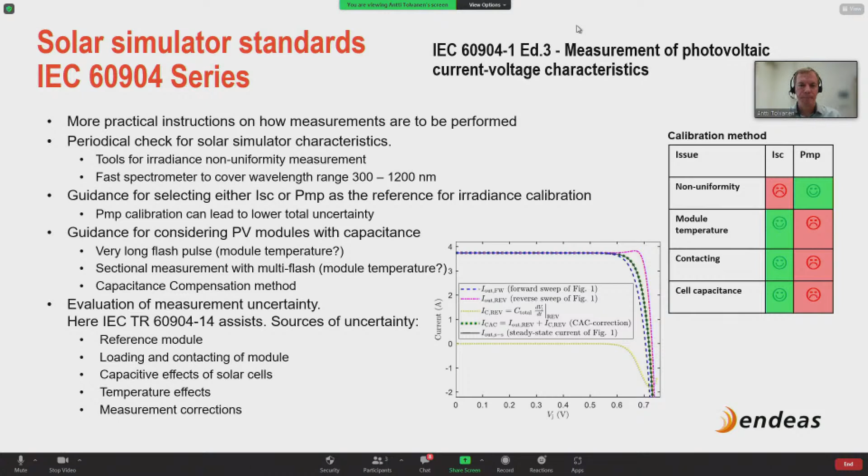So, in summary, latest standards emphasize the estimation of measurement uncertainty. Solar simulator classification is a starting point to lower uncertainty, but better classification does not guarantee low measurement uncertainty. The new versions of PV standards give a lot of practical guidance to better measurements.

Overall, the trend in manufacturing to keep good quality is to inspect modules thoroughly, and all-in-one testing systems incorporate all backend tests in a single machine.